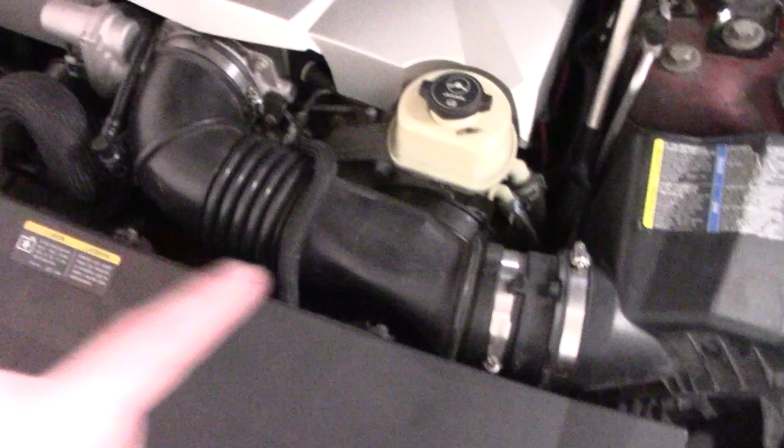Ever since I got this car, I've been looking at options for cold air intakes, and everything I read online tells me there's no point to get a $300 K&N or anything like that. Everybody tells me the most restrictive part is really only this elbow, and this part really necks down. So what I've been reading is that a lot of guys are just buying stuff from Frozen Boost and essentially making their own intake.

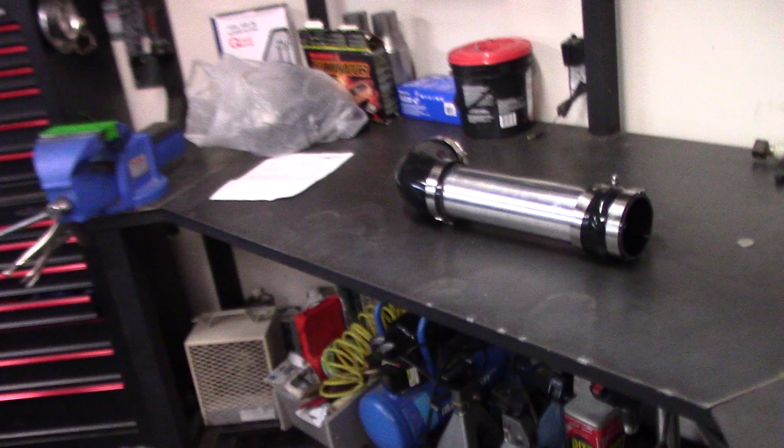It's only about $60. We're gonna make a 4-inch down to 3.5-inch aluminum pipe and then a hump hose coupler. It's about $60 for all this from Frozen Boost.

But the nice thing is I have HP Tuners, so I'll be able to swap the two pipes out and see if we really get any more airflow. We're gonna use the mass airflow sensor, located right here. We're not gonna change anything as far as the air box or air filters, that's for a future video, I got another one planned for you guys. Essentially I just want to see if there's any loss of airflow or pressure differential caused by this portion of the pipe.

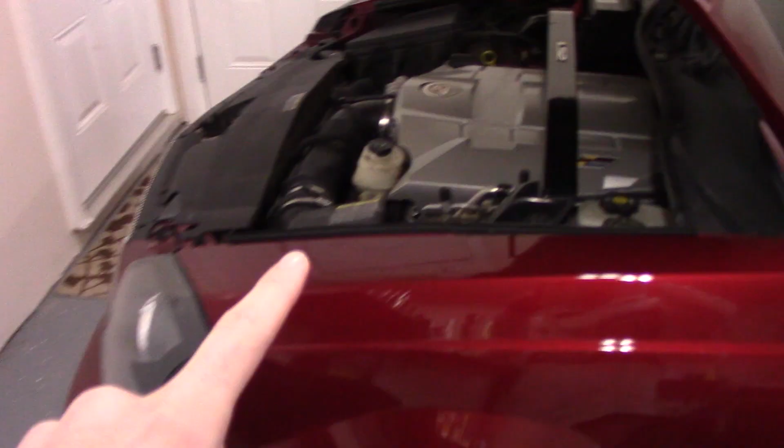First thing we gotta do now is, this is a 12-inch piece of aluminum pipe, we gotta cut it down to about 8 inches. We're gonna have to put it on the car and measure it. Then I'll do a back-to-back second gear pull with both intakes. So I'm gonna fab this up first, make sure everything fits, then quickly go do a second gear pull, come back in the garage, put the other intake back on, and do another second gear pull. We'll record the data on HP Tuners and go over the results.

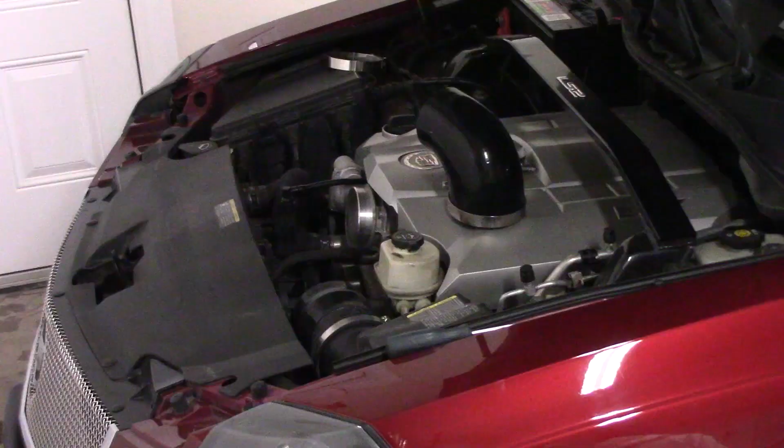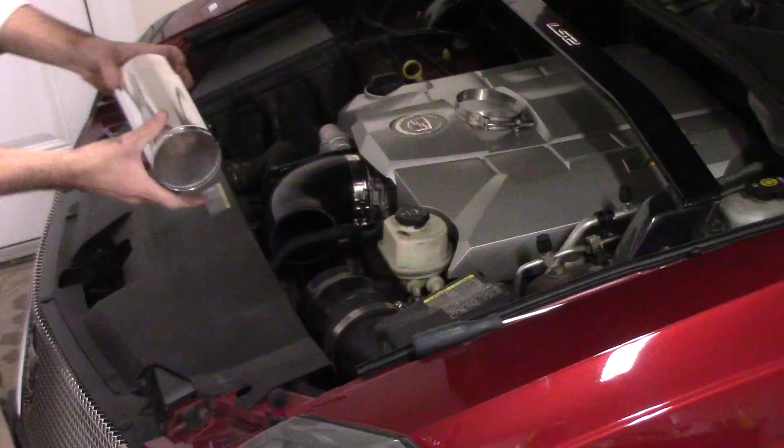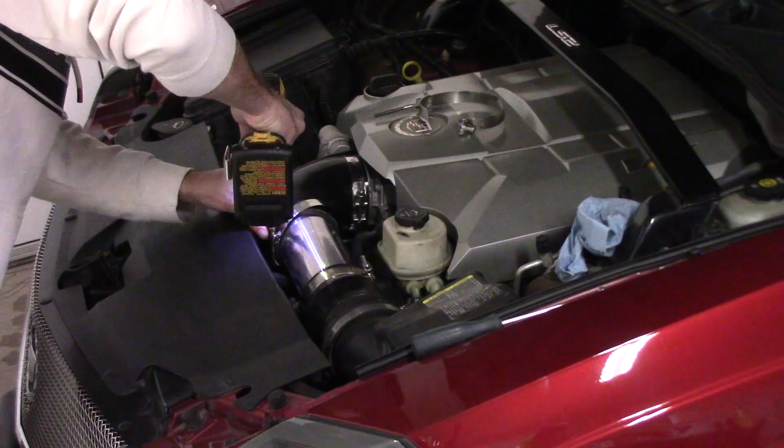Alright guys, so this is what it looks like. I think in a future video, since right now it's winter so it's not going to play a huge role, I'm going to wrap this aluminum pipe in some exhaust header wrap since it's not good for heat, but that'll be a next video. Now the other thing, because I'm LS2, I have this PCV port here, which I'm either going to put a breather on or bring it back here with a little bung, but right now for this test, all we're going to do is run it like this.

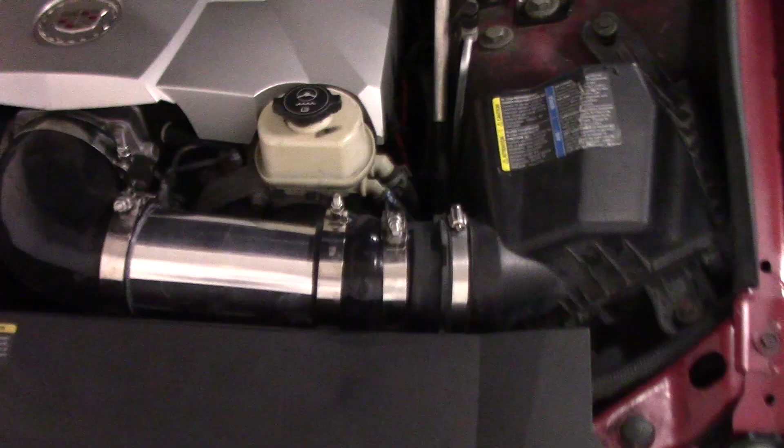Oh, one more thing. You guys can see that little nipple right there, I'm going to cut that off. I just wanted to leave it on for the test right now because I'm going to be putting the stock piece back on, that just locates it. It's really not a big deal.

Anyway, so what we're going to do is go outside, run the car, the breather is just going to breathe into the atmosphere, no big deal. Then we're going to record some HP Tuners data from the MAF sensor, and we'll throw the stock air box back on. It's a little ugly with the orientation of the clamps, don't worry, I'm gonna fix that, this is purely for a couple minutes. We're gonna run it, then I'm gonna try and get the T-bolt clamps to face down, so it's kind of a pain to install but it'll look good when the hood's up.

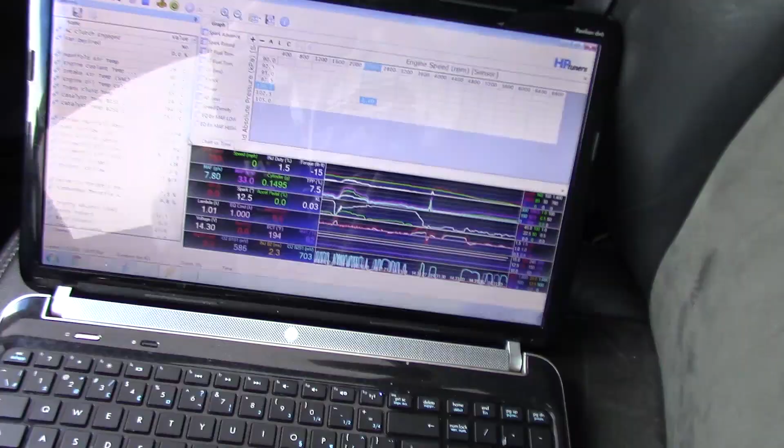Alright guys, so I'm gonna walk you through real quick before we do the pull what exactly we're gonna look at. Right here, manifold air temperature. I wanna see if this aluminum pipe is causing me any issues with heat soak during the pull. It's probably not gonna tell us a whole lot, but we're gonna take a look.

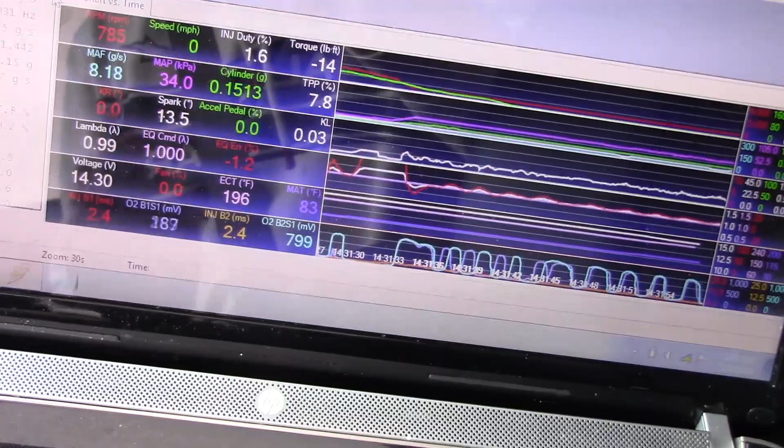The second thing we're gonna look at, if you look on the left here, is mass airflow sensor in grams per second. Those are the two we're gonna overlay with the two different air intakes. The third thing is your air induction losses, which is filtered straight for wide open throttle, and we're gonna look at the pressure differential between barometric pressure, outside pressure, and the pressure observed in the intake manifold.

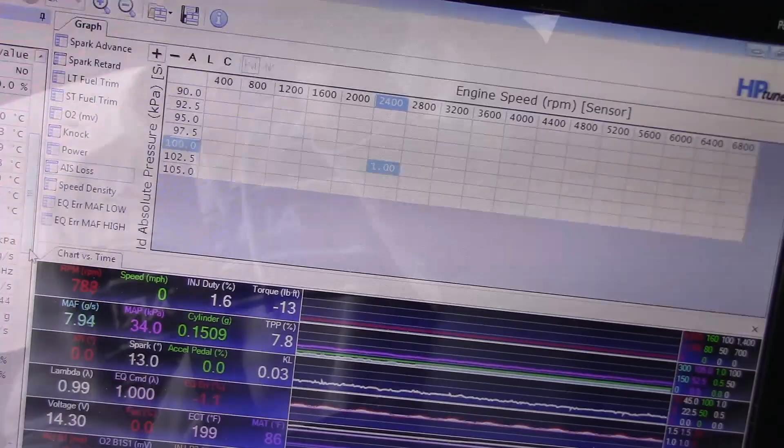Alright, so here we go guys. We're doing a pull from about 2,500 RPM, and we're gonna go. Okay, we might have to do a third gear pull. Alright, third gear pull now.

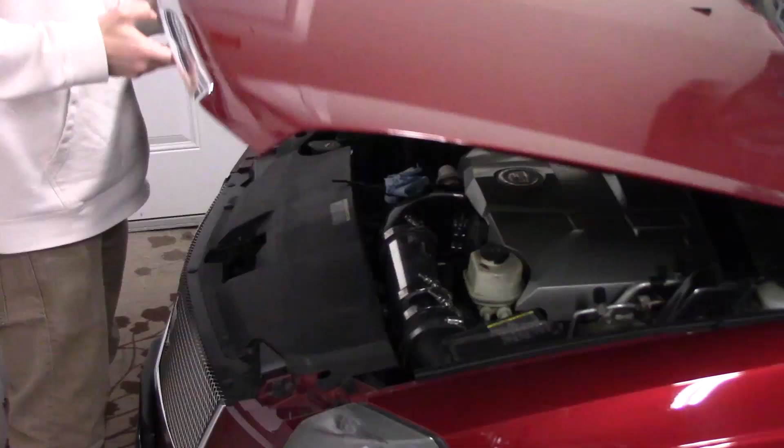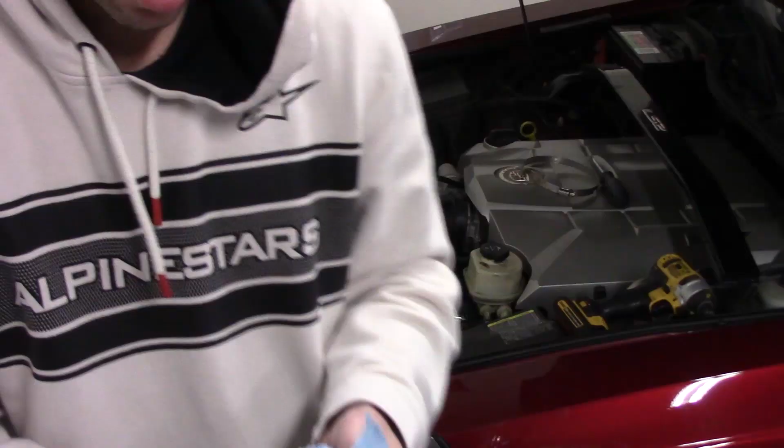Alright guys, we're about to do a pull here. This is with the stock intake on, so about 2500 RPM again. Alright, here we go.

Hey guys, so we just got back from taking the car out for a rip. I can tell you the butt dyno, nothing really felt any different between the two different intakes. So anyway, what we did was we did 2 pulls on each, right? 2 pulls with the stock in 3rd gear, and then 2 pulls with this intake right here. So this, what we're looking at here, is the data that we collected during those runs.

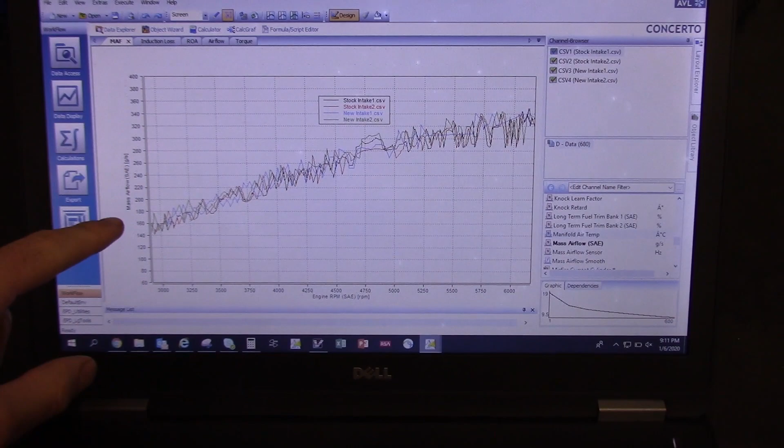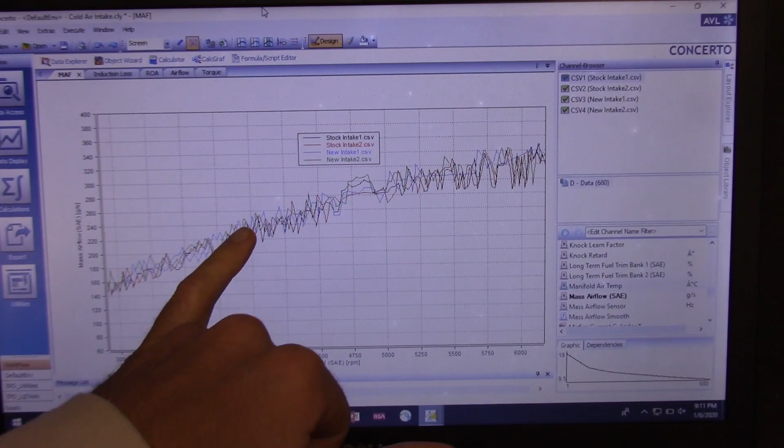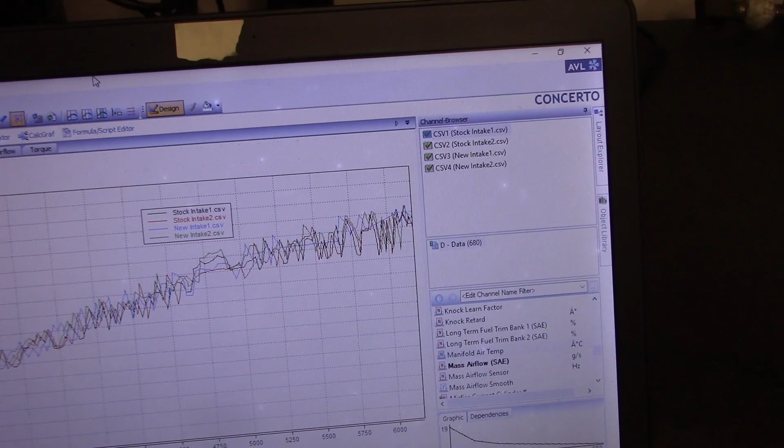So in this first plot, everything I'm going to show here is plotted up against engine speed on the x-axis. So the first one you're looking at is mass airflow sensor, grams per second, and you can see it's really noisy. Later I'll show you there's a PCM calculated filtered airflow parameter that's using this. If you look real close, you can see maybe there's a little bit of a difference at the high end here between the blue and the green and the red and the black. So the new intake's maybe got a slight edge over the stock intake, but not really a whole lot to see here.

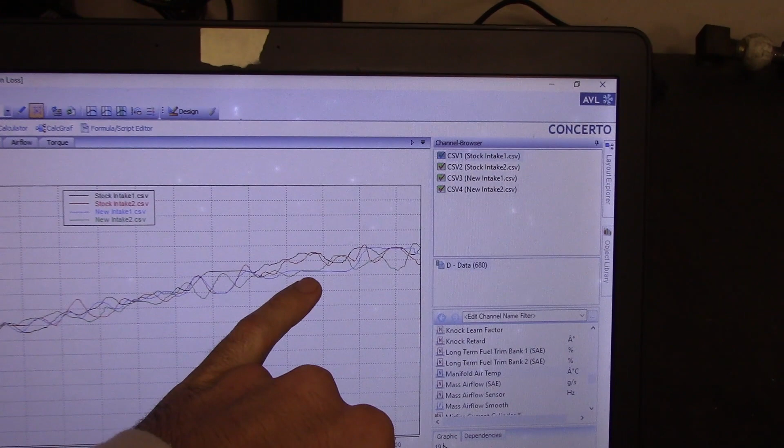So if we look at the pressure drop across essentially the whole system, what we're looking at here is your manifold pressure versus your barometric pressure, the pressure outside the vehicle. Starts at 0. Low engine speeds, you'd expect almost no pressure drop, and this is in PSI. But anyway, you can see at the very top end, the blue and the green is maybe a little bit lower than the stock intake, so it's probably a little bit better, on the order of a couple tenths of a PSI.

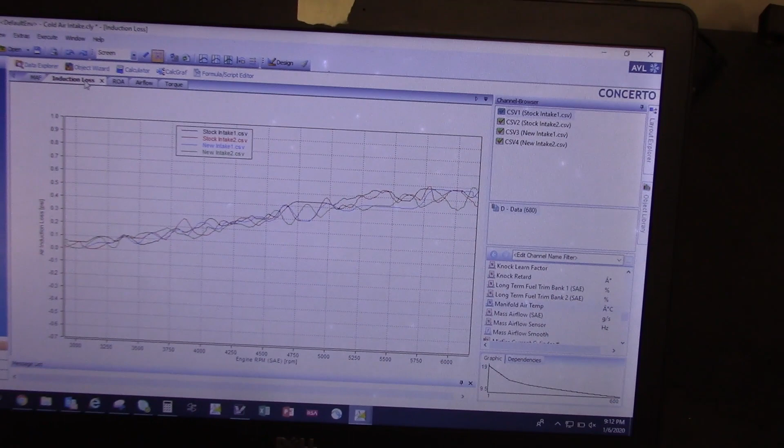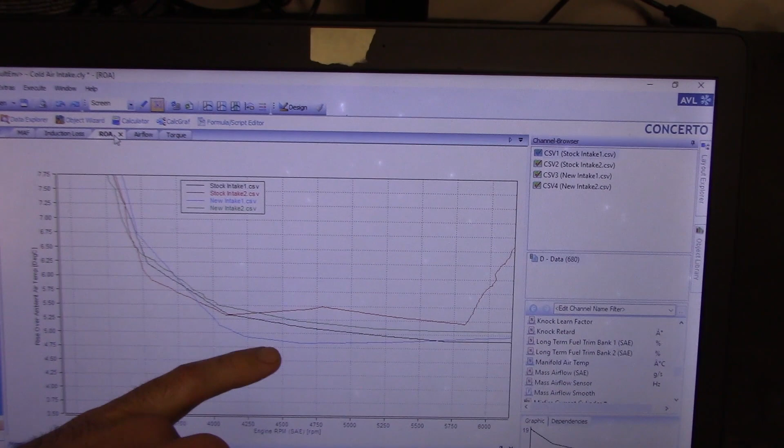So the 3rd metric we're using here is temperature rise over ambient temperature. We're looking at the top, at the beginning of the pull here. This is when the throttle opens up. So you're cruising along, I'm not going to say heat soaked, but your tube is definitely warmed up. And you can see as soon as we crack the throttle, we get some air flowing in there, it drops down significantly. So you can see, as far as heat soak, it doesn't look like the aluminum tube is making that much of a difference.

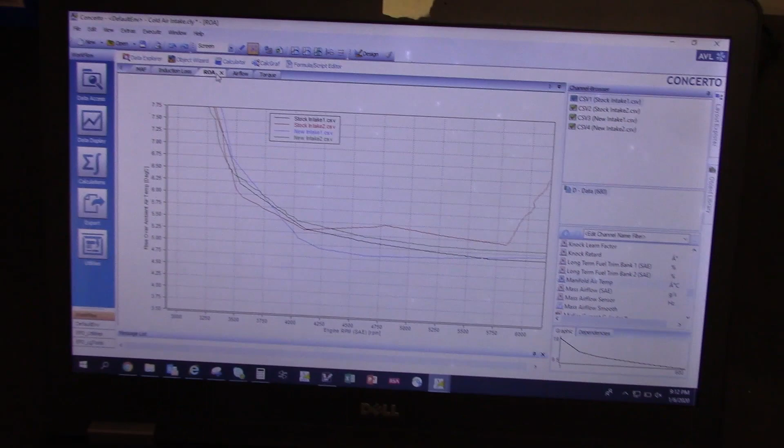Now, we are in the middle of winter, so it was about 30-ish degrees, 35 degrees when we did the pulls. So we'll have to retest this in the summer. But you can see for now, there's really no difference between the different intakes on this plot here.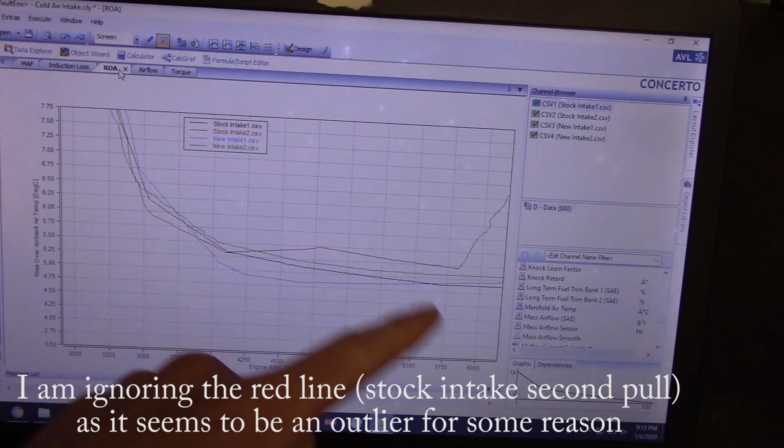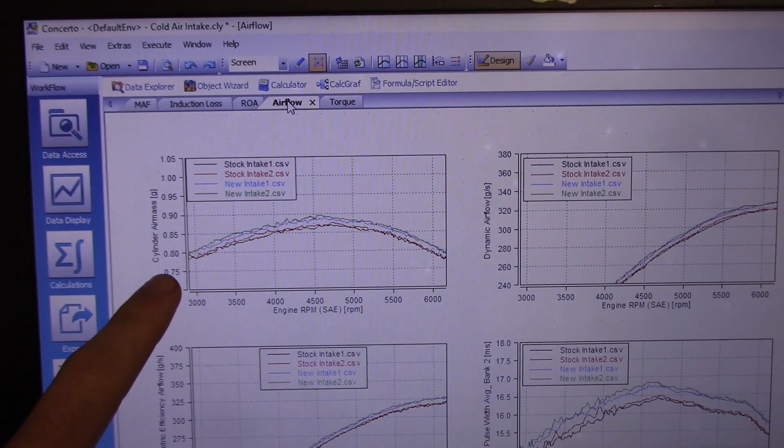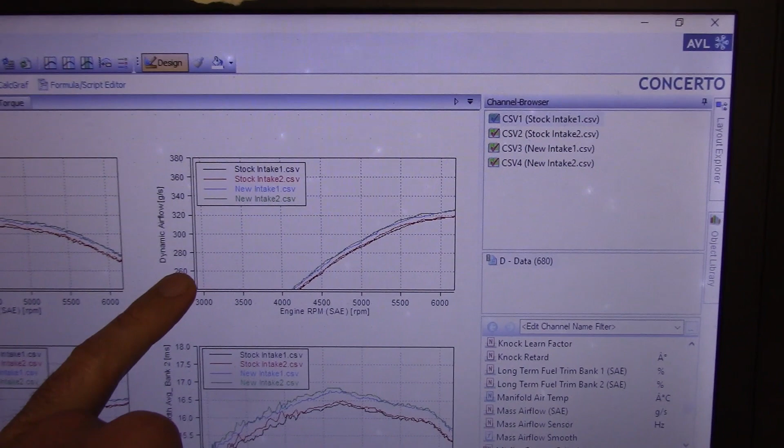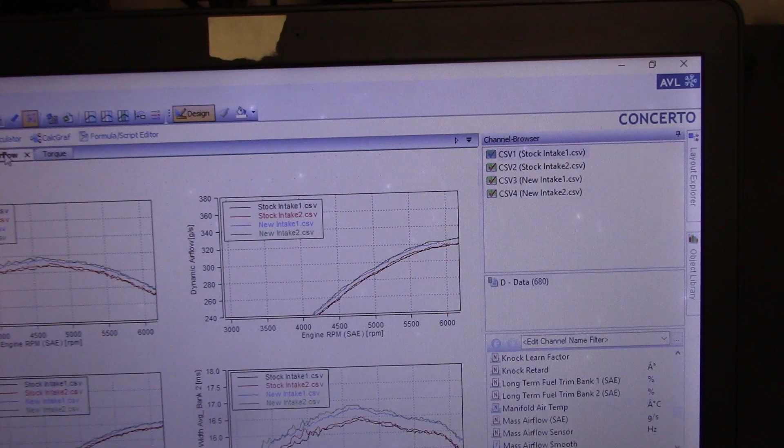So really what you want to see is the conclusion slide here. What you're looking at is: is the engine getting any more airflow? And it's measuring a pretty consistent increase, about 2.5% across the whole rev range. And then the dynamic airflow, that's essentially the final parameter that your PCM is using to schedule how much fuel is going to be injected in the power stroke. So again, about 2.5% all across the rev range there.

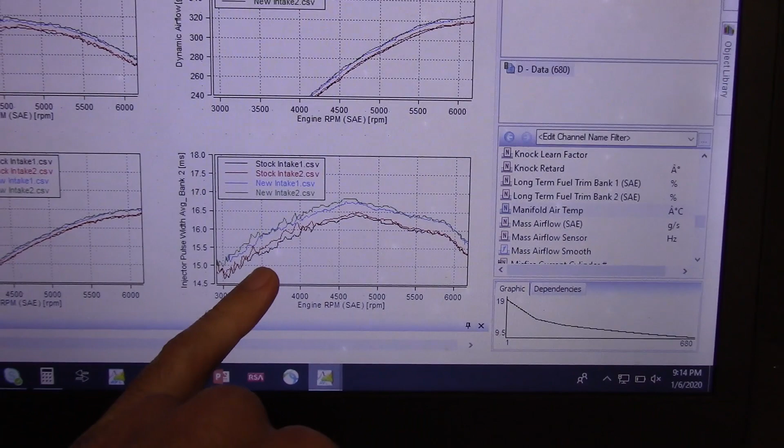And if we just take a quick look at fuel injector pulse width, again, shows the same trend. So everything kind of boxes that on average, the aluminum intake probably flows about 2.5% better than the stock intake.

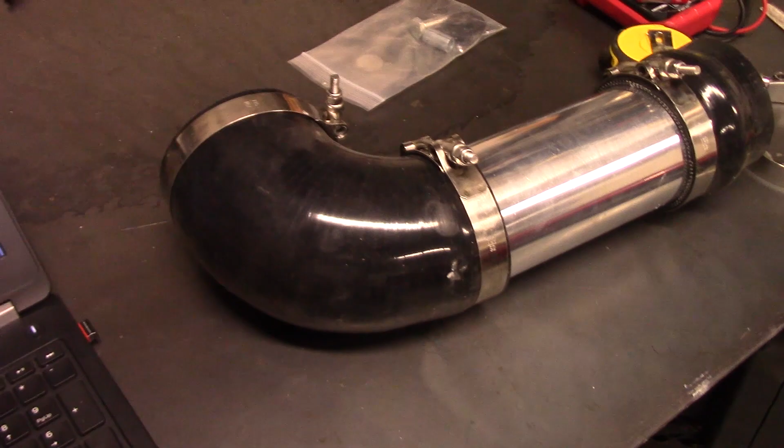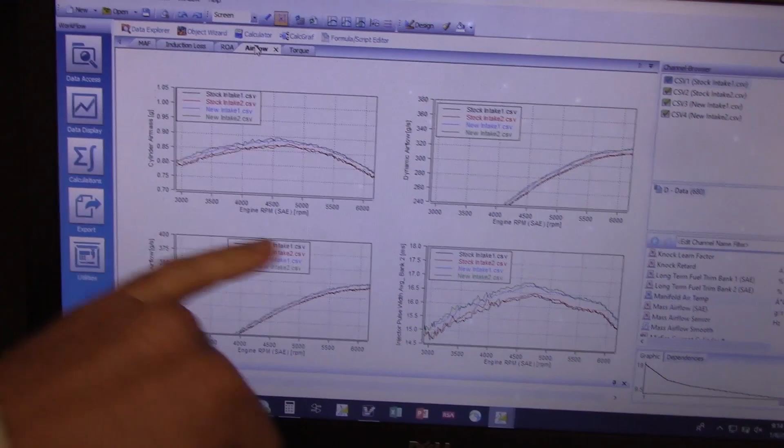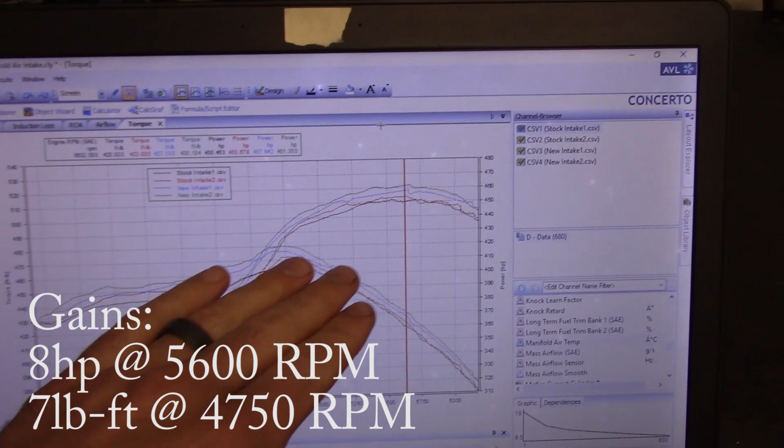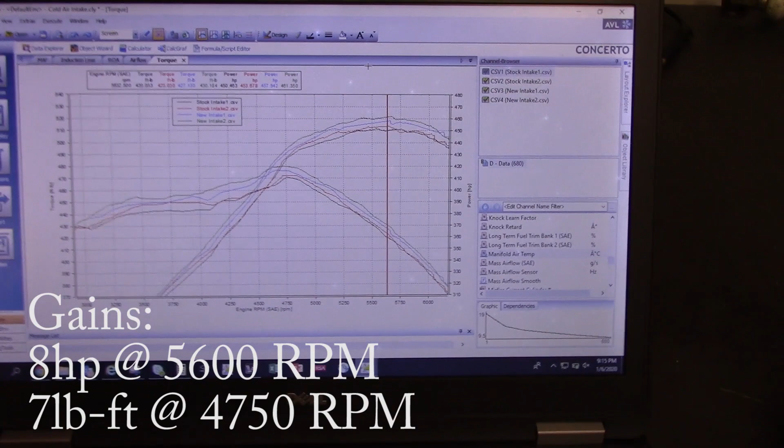And if we look at peak power, you're probably looking at roughly 5 horsepower. And I think my air filter is really dirty. I know it is, but these LS2s are supposed to peak at 6,000 RPM. My peak I'm seeing here is around 5,700. So that's telling me that there's probably a steep drop off in torque, and that's probably caused by my really dirty air filter.